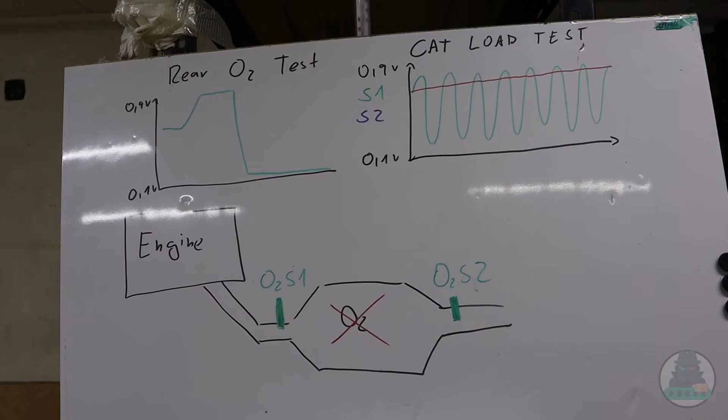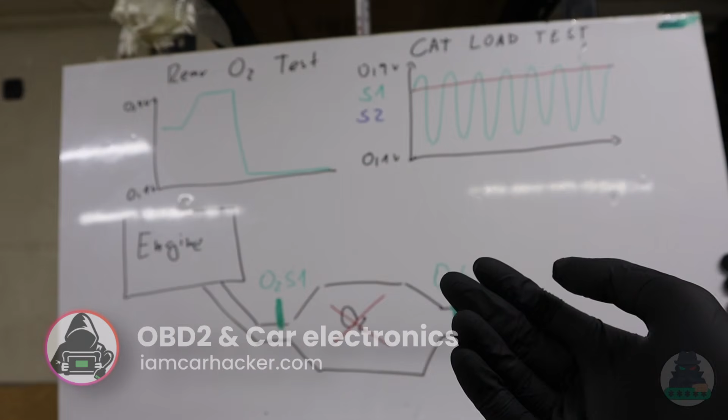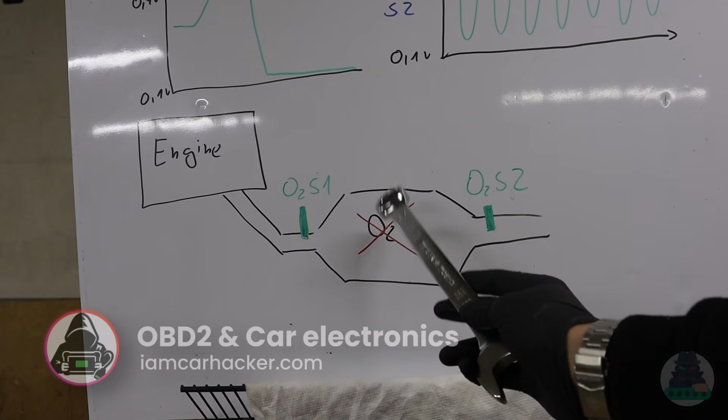There is a very simple way how you can test a catalytic converter using only your scanner by looking at live data. This test is for gasoline cars because you will need oxygen sensors for this to work. The whole idea of this test is to compare oxygen before the catalytic converter and after the catalytic converter. On gasoline cars you will have a catalytic converter and at least 2 oxygen sensors.

Now how the catalytic converter works, it uses oxygen to get rid of harmful emissions. So in theory, if it works, you will have less oxygen after, because it was already used to get rid of harmful emissions. And we have to do 2 tests to determine if our catalytic converter works.

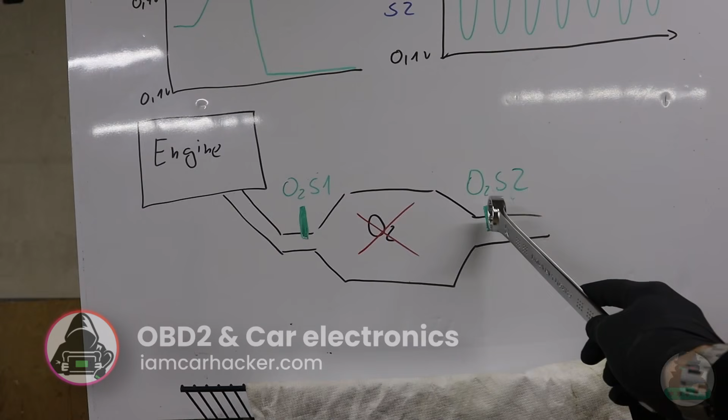The first test is just to check if the oxygen sensor, the downstream oxygen sensor, so behind the catalytic converter, works properly. For that we will use this very simple test. All you have to do is open live data with the downstream oxygen sensor, with the engine at operating temperature.

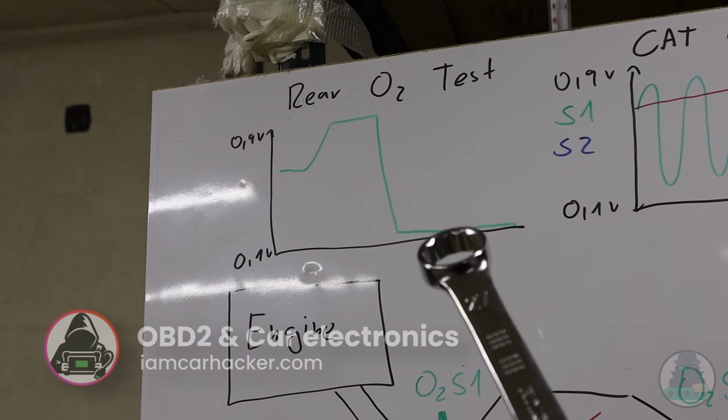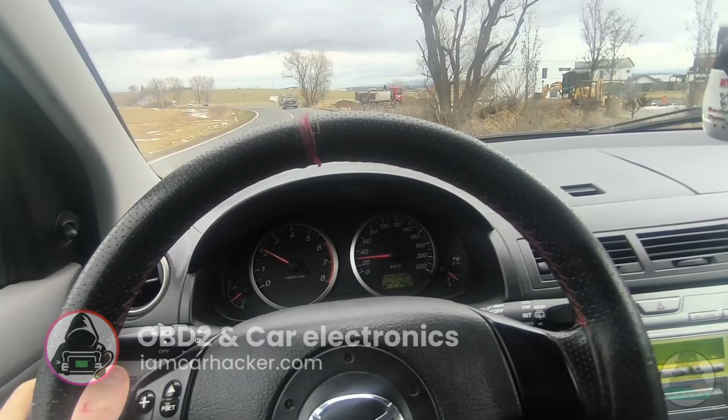Drive at around 2000 RPM with steady speed, then put full throttle for about 2 seconds, then let go of the pedal and let the car brake by itself for 2 or 3 seconds. We check this rear oxygen sensor test starting from 2000 RPM, full throttle, then let go for 3 seconds.

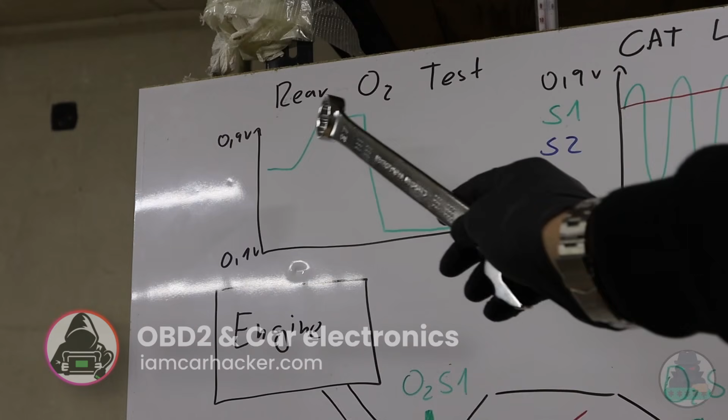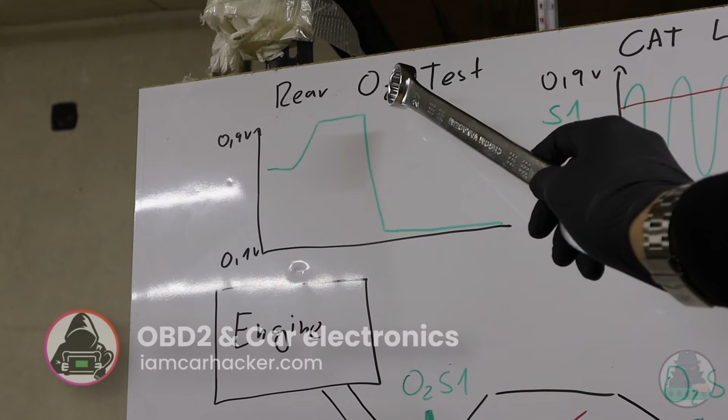If the rear oxygen sensor is working properly, you will see a graph like this. This is steady speed. Now when you hit that full throttle, you should see the value jump very close to 0.9 volts, so almost at the maximum. Once you let go of the gas pedal and let the car brake naturally without using brakes, you should see the oxygen sensor data drop to minimum value and stay down. If you see a graph like this, your rear oxygen sensor is fine.

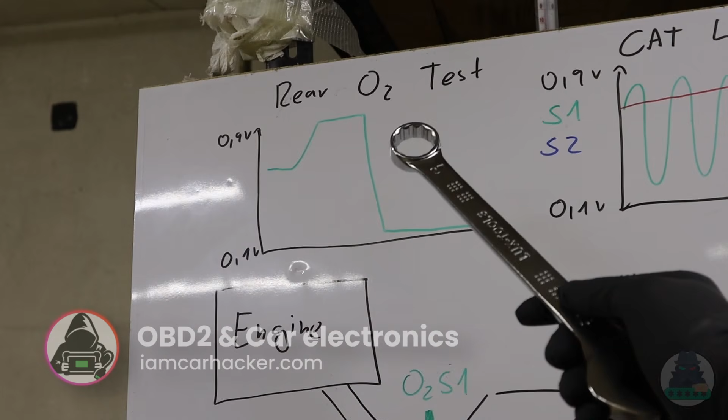And we can move to the actual catalytic converter test. We check this rear oxygen sensor test starting from 2000 RPM, full throttle, then let go for 3 seconds.

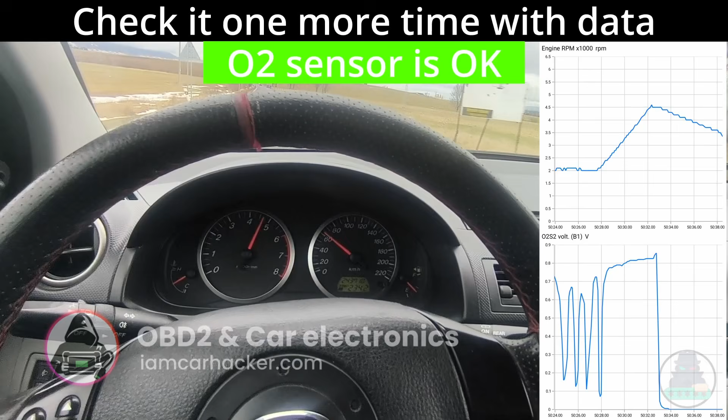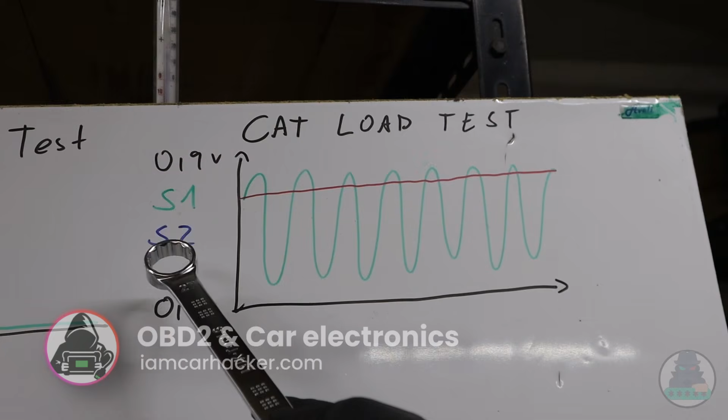For this test it is better to just use data logging, so you don't have to look at the screen while driving, and you want to log oxygen sensor 1 data and oxygen sensor 2 data. Oxygen sensor 2 is the same as in the previous test, but we will also add voltage from oxygen sensor number 1. Now how do you do this test?

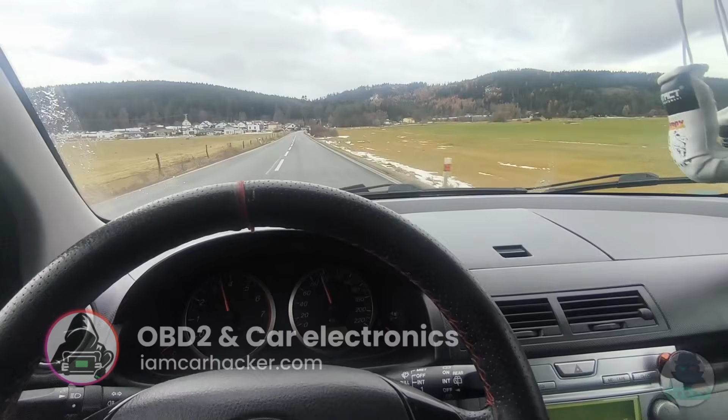For this test you will have to find some place where you can drive for about 15 seconds at steady speed. You want to hit throttle at about 50%, steady, maybe starting around 3000 RPM. It will rise a little bit, and you want to keep that 50% throttle for about 15 seconds. This is the catalytic converter load test, so I'm keeping about 50% throttle steady for at least 10 or 15 seconds, okay, so around 15 seconds.

And then if your catalytic converter works, you will see a graph very similar to this. Oxygen sensor 1, the upstream oxygen sensor, will be oscillating up and down between rich and lean condition. Oxygen sensor 2 should keep a steady value, around 0.7 to 0.9 volts, so in that high range of the graph. This is an example of a good working catalytic converter.

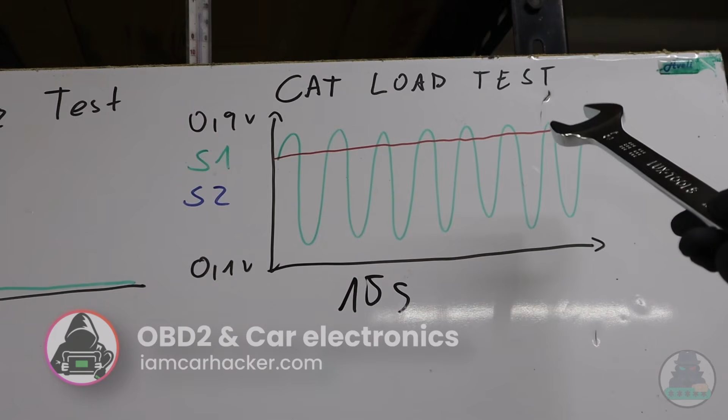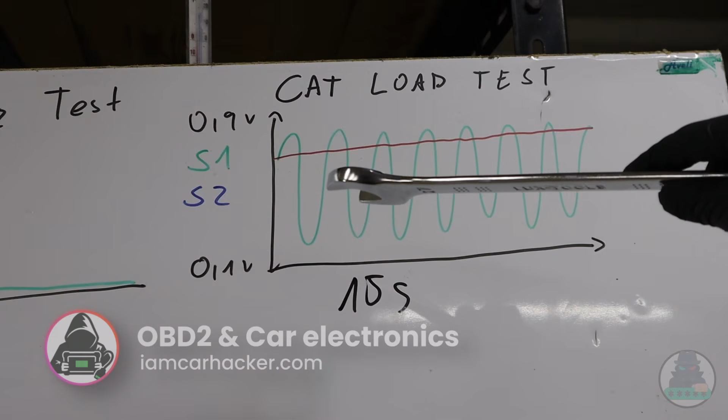Now if that works, but we are still unsure about your catalytic converter, you will repeat this test, but this time instead of 50% throttle you will increase it to 60%, and then you can do one more test and increase it to 70%. If with 70% throttle you still see a graph like this, your catalytic converter is fine.

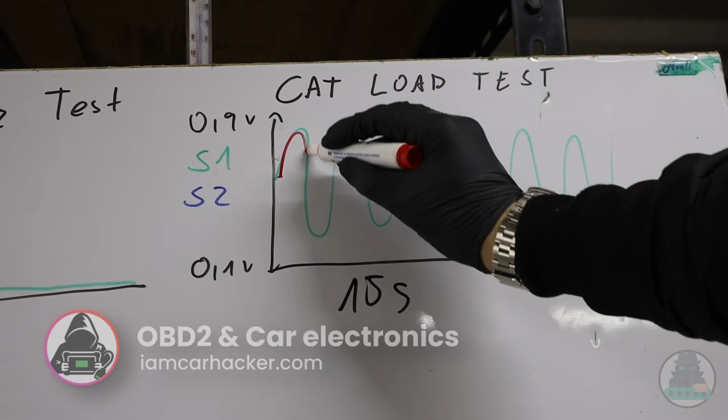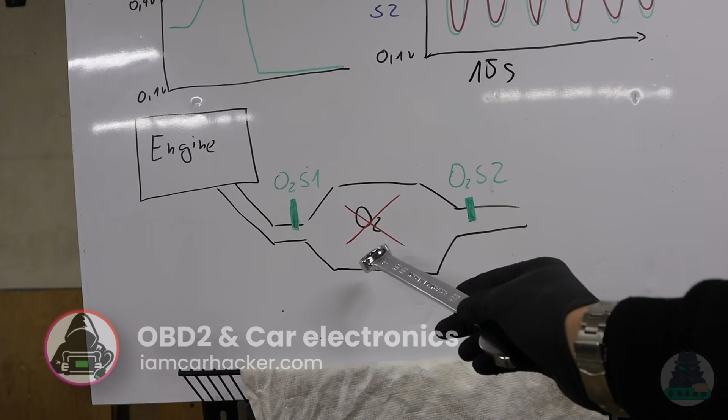If your cat is bad, you most likely will see a graph like this: sensor 1 will be oscillating and sensor 2 will be copying the behavior of sensor 1. What this means is that once the harmful emissions and oxygen reach the catalytic converter, it just cannot handle it, so it lets everything pass through. That's why you will see the same value for oxygen before the cat and also after the cat.

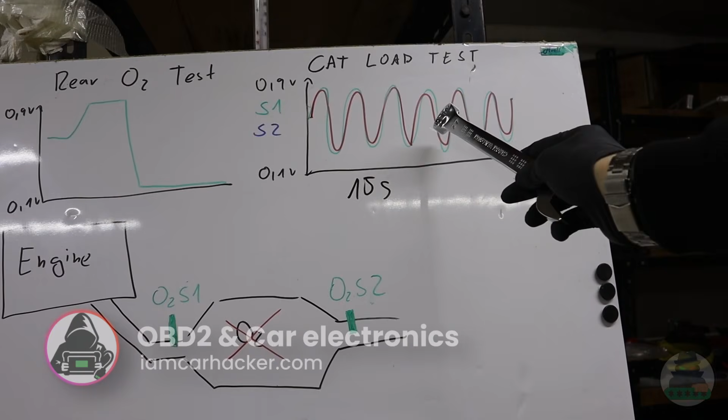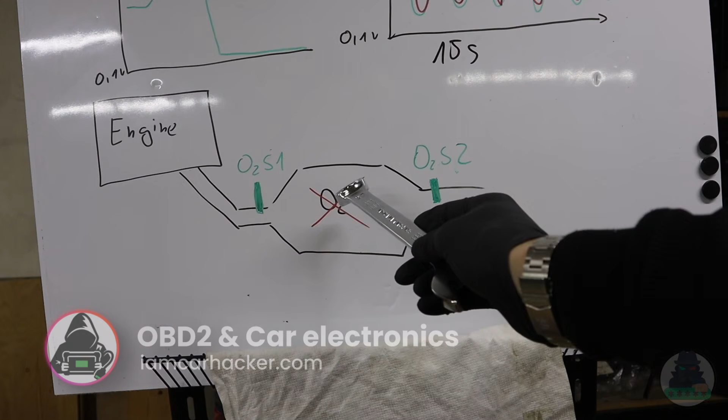And if you see this data and there is literally no difference, even when you are idling, when you do some more driving tests, and they are exactly the same, there is a high chance that you don't even have a catalytic converter. Somebody already removed the internal parts, sold it, and now you just have the case.

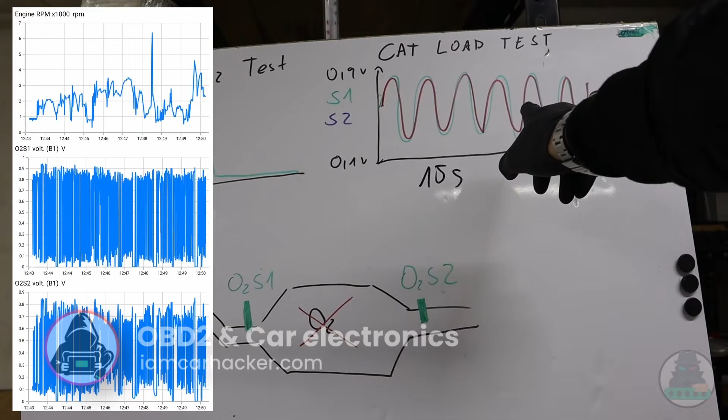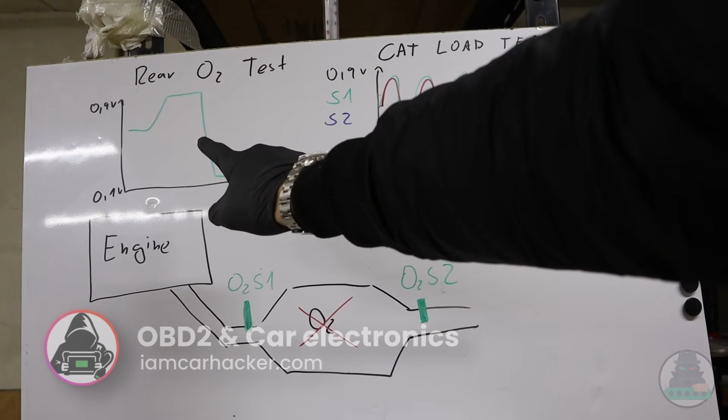Now for the test I did on my Mazda, I did around a 10 minute drive and logged data. Just when I open the data, I don't even have to look for this part. I already see the oxygen sensor behavior is very similar, so the catalytic converter is not working. All I have to do to confirm is just look for this test to make sure my rear oxygen sensor is working properly, which it does, so I can say my cat is bad.